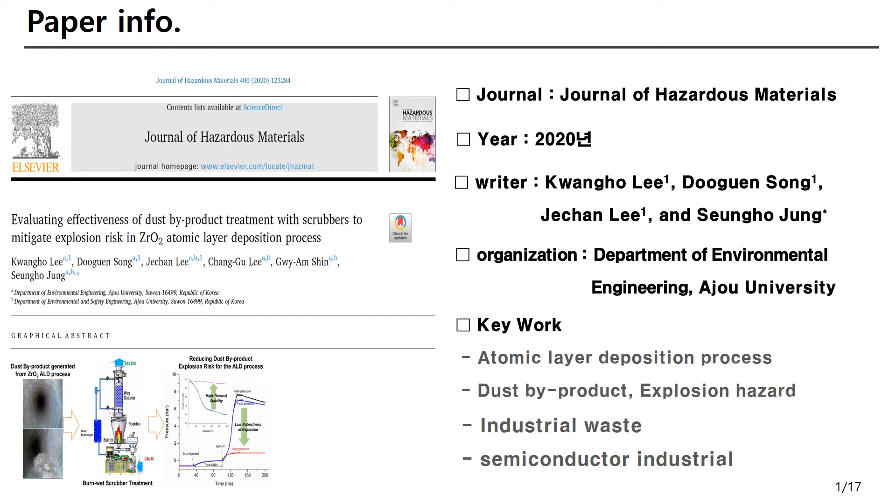Authors are 이.광호, 송두근, 리제찬, and 정승호. Organization is Department of Environmental Engineering, Ajou University. Keywords are atomic layer deposition process, dust byproduct, explosion hazard, industrial waste, semiconductor industry.

This is introduction. Atomic layer deposition is a method that allows deposition of highly controlled thin films on various substrates in the vapor phase. The technique has been widely used in a large variety of applications such as fabrication of semiconductor logic and memory devices.

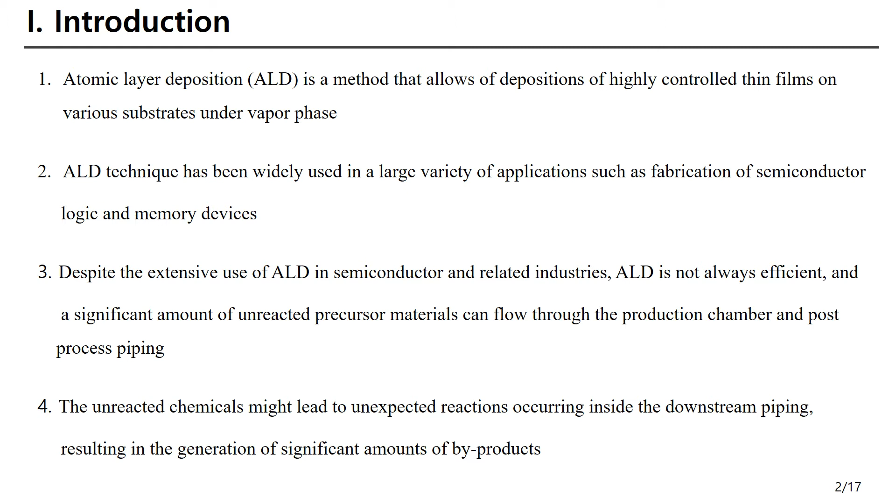Despite the extensive use of ALD process in semiconductors and related industries, ALD is not always efficient, and a significant amount of unreacted precursor materials can flow through the production chambers and post-processing piping. The unreacted chemicals might lead to unexpected reactions occurring inside the downstream piping, resulting in the generation of significant amount of byproduct.

According to a survey conducted by SEMATECH, more than 70 incidents have occurred during 5 years in semiconductor and related industries, and among the 70, 40 incidents occurred at downstream of tool. In addition, the byproducts may be harmful to human health.

For example, 21 employees at the semiconductor manufacturing facilities in the Republic of Korea were recently afflicted with headache and had to be hospitalized due to the leakage of gas and particulate byproducts and non-reacting chemicals from a pipe connected to a vacuum pump that broke due to an increase in the pipe temperature via heating jacket.

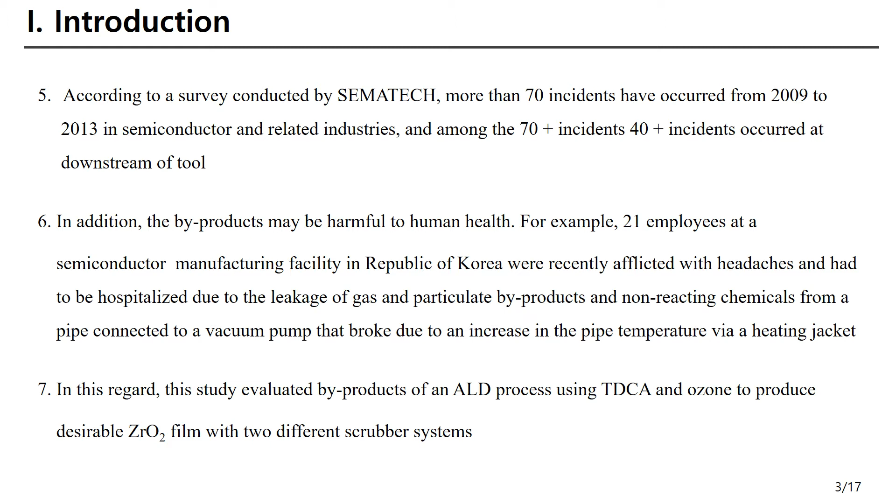In this regard, this study evaluated byproducts of an ALD process using TDCA and ozone to produce desirable zirconium oxide film with two different scrubber systems. To evaluate the effectiveness of the treatment of dust byproduct with different scrubbers to mitigate explosion risk in the zirconium oxide ALD process, untreated byproduct generated in the same ALD facility was also characterized, and its characteristics were compared with those of two treated byproducts with dry scrubber and burn-wet scrubber.

The result of this study would help not only suggest more effective methods to treat byproducts of ALD processes that present explosion risk, but also develop better safety controls for ALD manufacturing process in semiconductor industry.

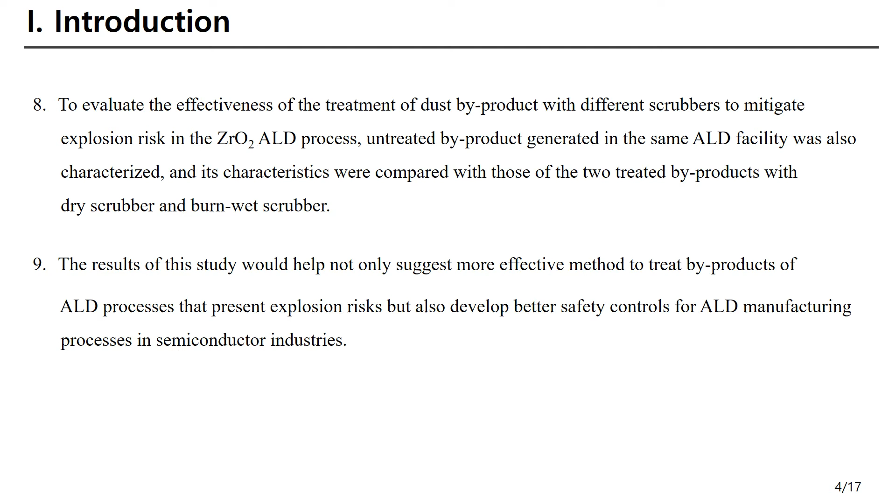Material and method. 3 byproduct samples were collected during the maintenance at the full-scale ALD zirconium oxide manufacturing facility that is depicted. The byproduct generated in the ALD process is handled by using primary scrubber and main scrubber. Primary scrubber is used to treat particularly the dust byproducts generated from the zirconium oxide ALD process.

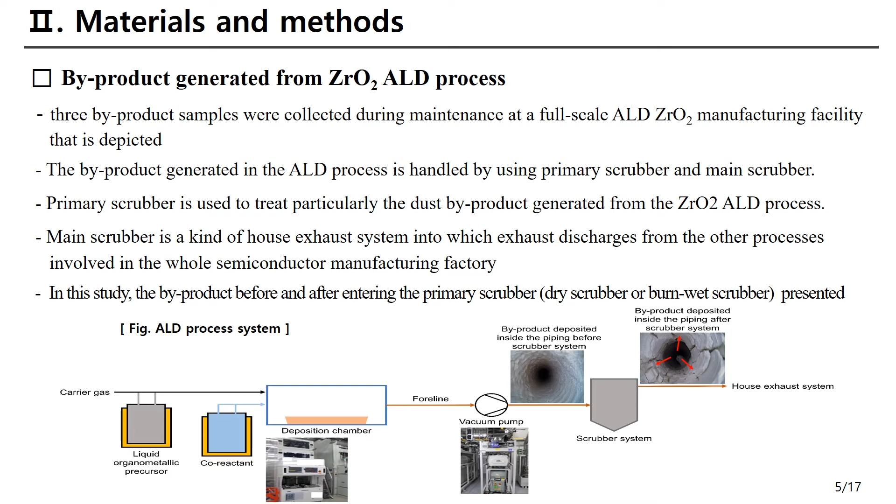Main scrubber is a kind of house exhaust system into which exhaust is discharged from the other processes involved in the whole semiconductor manufacturing factory. In this study, the byproduct before and after entering the primary scrubber is presented in the pictures. The 3 samples were collected and used for all experiments.

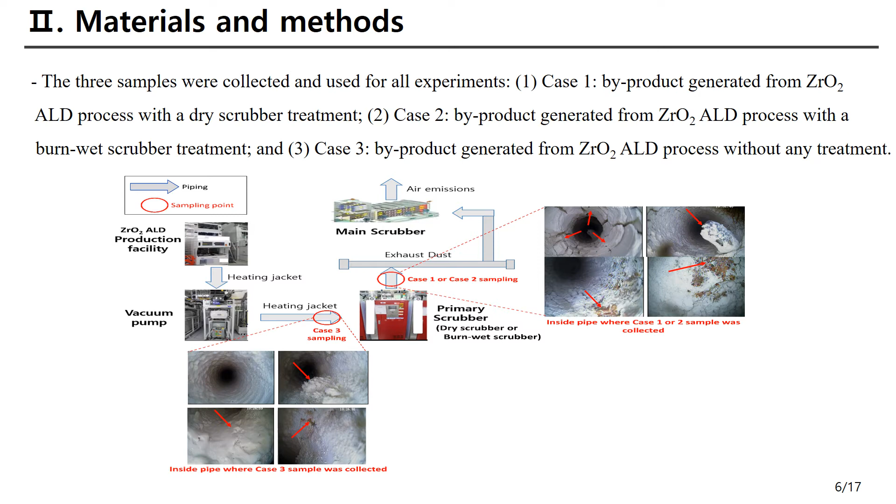Case 1, byproducts generated from zirconium oxide ALD process with a dry scrubber treatment. Case 2, byproduct generated from zirconium oxide ALD process with a burn wet scrubber treatment. And third, byproduct generated from zirconium oxide ALD process without any treatment.

This is the analysis method. In the byproduct generation in zirconium oxide ALD process, although most volatile byproducts can effectively be treated by heating the foreline, less volatile byproducts can deposit inside pipes through the post-production facility. The deposited solid materials may contain a mixture of substances that can explode upon exposure to water or oxygen. Hence, the byproducts deposited in the pipeline incur considerable explosion risk.

Therefore, they need to be properly treated in order to reduce the explosion risk as part of a process safety strategy. In following subsections, material characteristics and dust explosion characteristics of the byproducts with and without the scrubber treatment are presented.

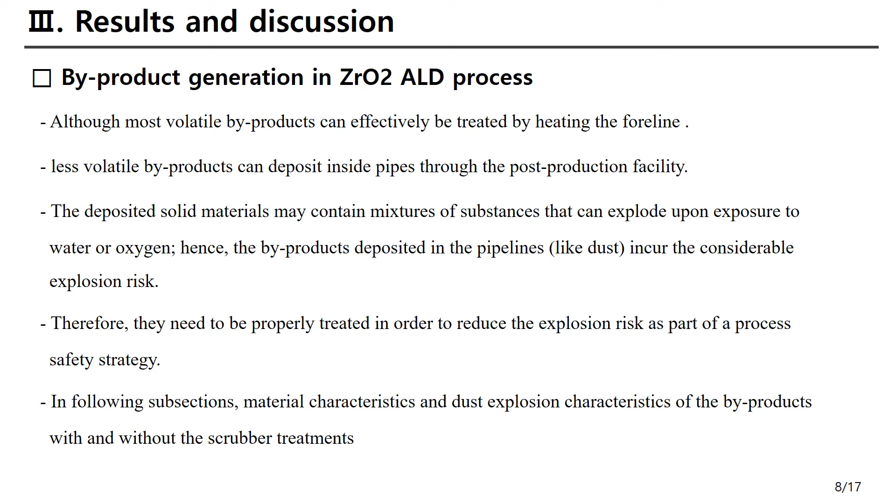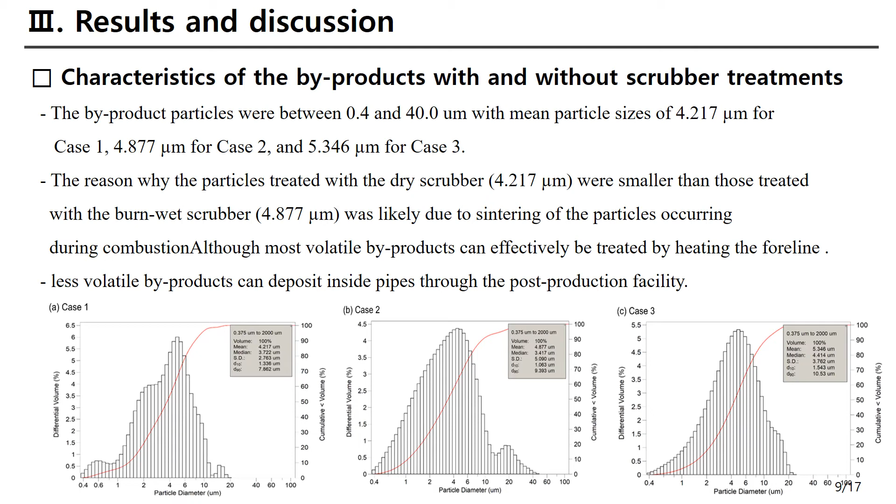Although most volatile byproducts can effectively be treated by heating the foreline, less volatile byproducts can be deposited inside the pipe through the post-production facilities.

EDS element analysis demonstrated that 4 elements are present in the byproduct, as summarized in Table 2. Note that the absolute compositions of the samples were not valid as the EDS was not calibrated. However, the EDS results can be compared from sample to sample. Comparison of the EDS results between case 2 and case 3 indicated that carbon, nitrogen, and oxygen are leaving the byproduct upon combustion of the sample. Dry scrubber treatment had little effect on the elemental composition of the byproducts.

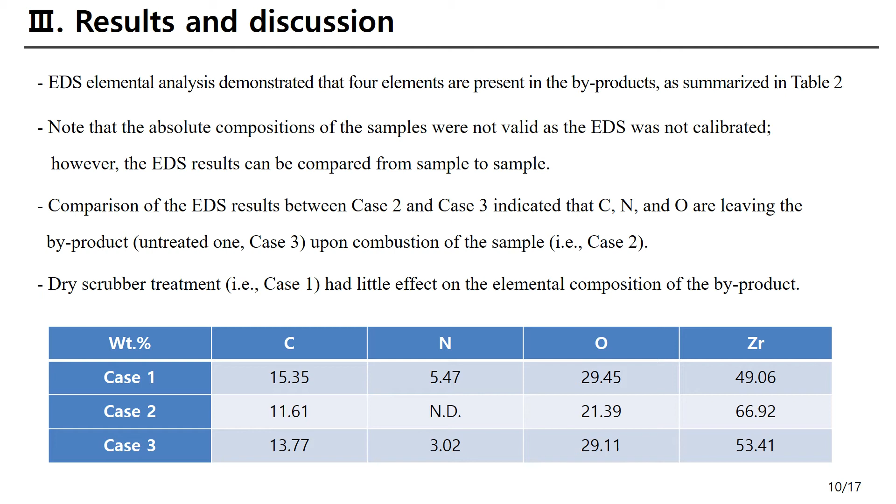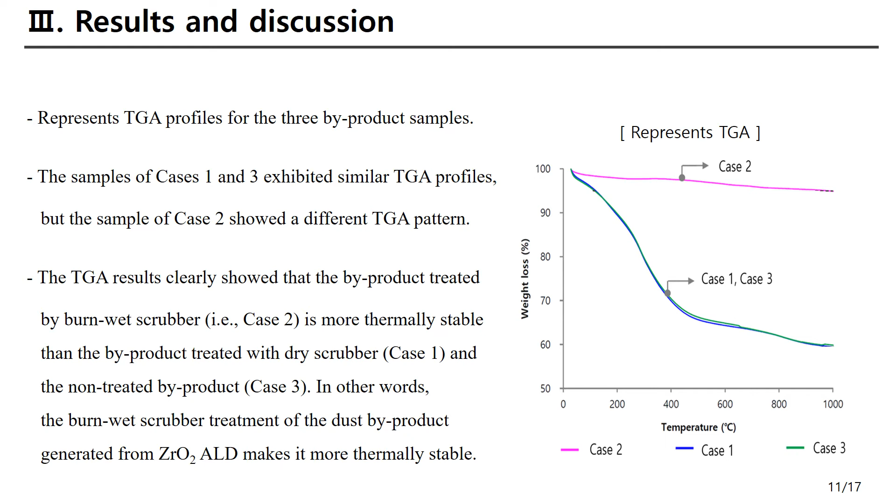This represents the TGA profile for the 3 byproduct samples. The samples of case 1 and 3 exhibited similar TGA profiles, but the sample of case 2 showed a different TGA pattern. The TGA result clearly shows that the byproduct treated by the burn wet scrubber is more thermally stable than the byproduct treated with the dry scrubber and the non-treated byproduct. In other words, the burn wet scrubber treatment of the dust byproduct generated from zirconium oxide ALD makes it more thermally stable.

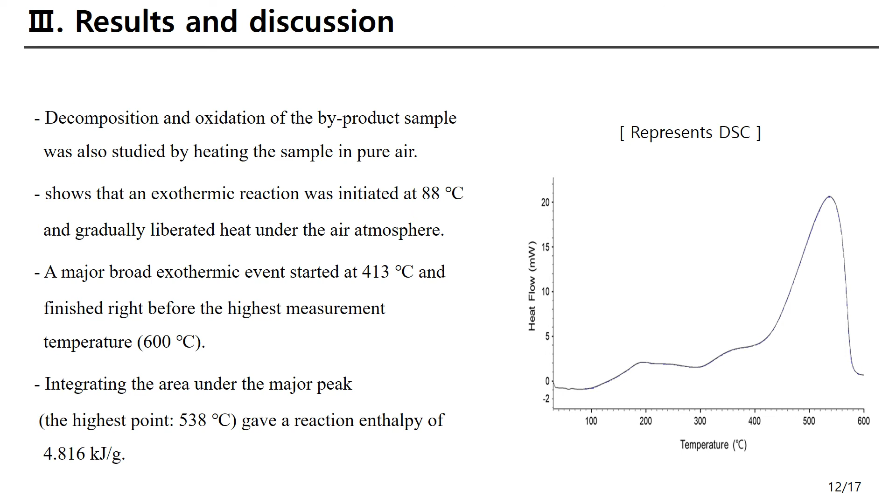The decomposition and oxidation of the byproduct sample was also studied by heating the sample in pure air. This shows that an exothermic reaction was initiated at 88 degrees Celsius and gradually liberated heat under the air atmosphere. A major broad exothermic event started at 413 degrees Celsius and finished right before the highest measurement temperature. Integrating the area under the major peak gave a reaction enthalpy of 4.816 kJ per gram.

FTIR analysis revealed a peak in the region between 3,300 and 3,600 per centimeter, which can be attributed to oxygen and hydrogen bonds, and is thus indicative of the presence of moisture in the byproduct. The peaks between 1,250 and 1,500 per centimeter represent the carbon and hydrogen bonds in alkanes, and those at 1,500 to 1,740 per centimeter represent the nitrogen and hydrogen bonds in amines, which have a high risk of explosion.

In the samples of case 1 and 3, the peaks for amine and alkane are strong, but they are weaker in the case 2 sample. This was likely because explosive organic residue remaining in the byproduct had been combusted by the burn wet scrubber treatment. Thus, the fire risk would be lower with the use of the burn wet scrubber because of the removal of amine and alkane based material.

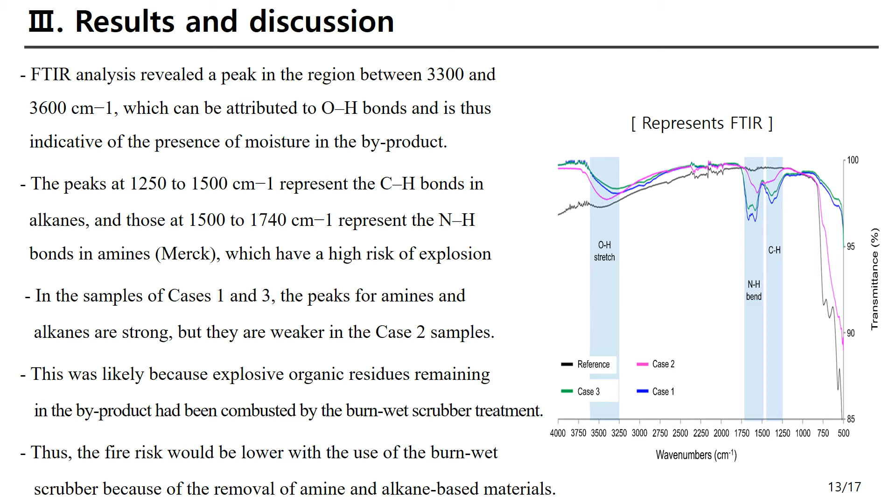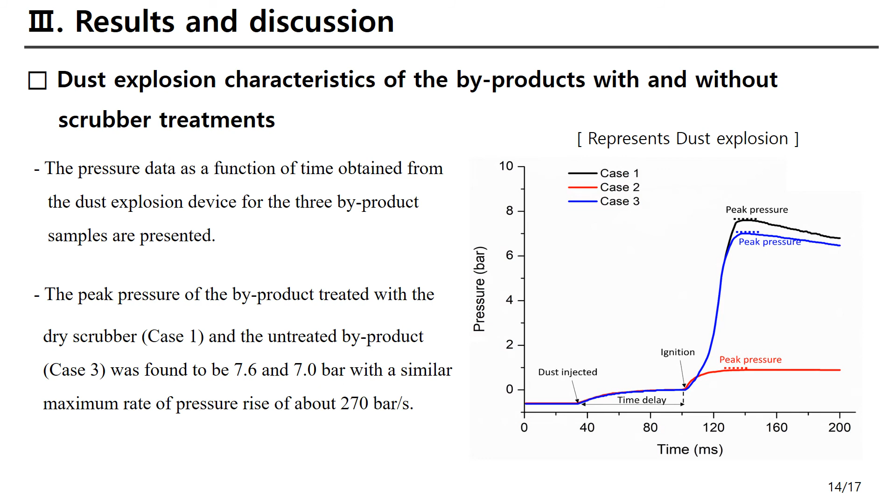The pressure data as a function of time obtained from the dust explosion device for the 3 byproduct samples are presented. The peak pressures of the byproduct treated with a dry scrubber and the untreated byproduct were found to be 7.6 and 7.0 bar, with a similar maximum rate of pressure rise of about 270 bar per second. When the burn wet scrubber was used for the treatment of the byproducts, the peak pressure was found to be 0.9 bar with a maximum rate of pressure rise of 16.4 bar per second. The maximum rate of pressure rise for the byproduct sample of case 2 was 15 times lower than that for the byproduct samples of case 1 and 3.

Given that the maximum rate of pressure increase after ignition of the dust byproduct indicates the explosion robustness, this clearly indicates that the burn wet scrubber treatment decreased the robustness of explosion caused by the byproducts generated from the zirconium oxide ALD process.

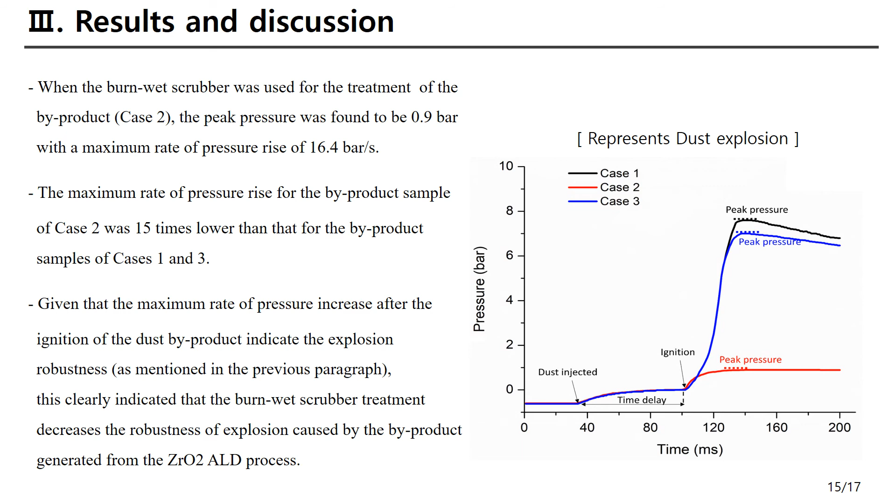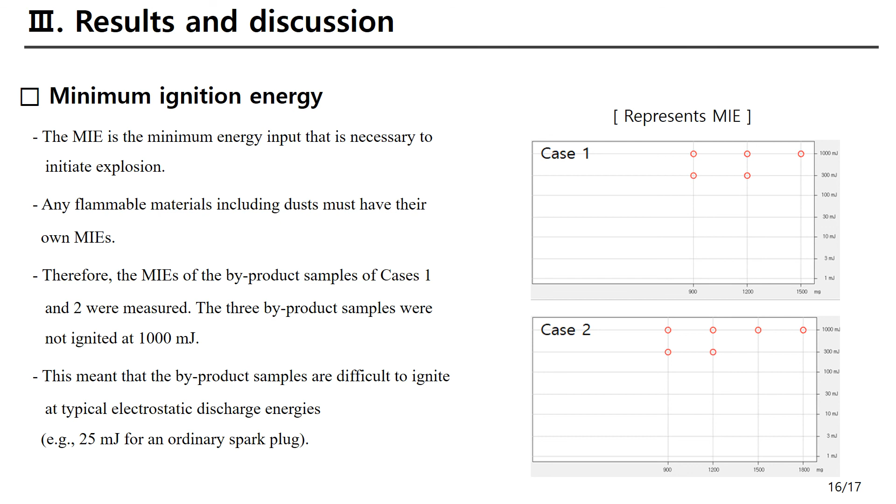The minimum ignition energy is the minimum energy input that is necessary to initiate explosion. Any flammable materials, including dust, must have their own MIEs. Therefore, the MIEs of the byproduct samples of case 1 and 2 were measured. The 3 byproduct samples were not ignited at 1000 millijoules. This means that the byproduct samples are difficult to ignite at typical electrostatic discharge energy.

As a result, the key results of this study can be summarized as follows. First, the dry scrubber treatment led to a smaller average particle size of the byproduct than the burn wet scrubber treatment. Note that smaller particles can lead to a higher risk of dust explosion. Second, the burn wet scrubber treatment affected the elemental composition of the byproduct. Third, the burn wet scrubber treatment resulted in making the byproduct somewhat stable. Fourth, burn wet scrubbing of the byproduct decreased surface functionalities that are associated with explosion.

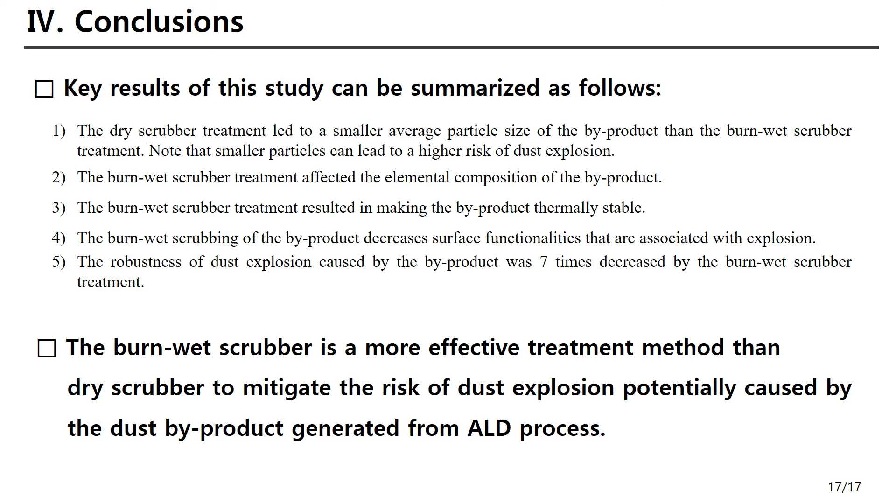Finally, the robustness of dust explosion caused by the byproduct was 7 times decreased by the burn wet scrubber treatment. The burn wet scrubber is a more effective treatment method than the dry scrubber to mitigate the risk of dust explosion potentially caused by the dust byproduct generated from the ALD process.